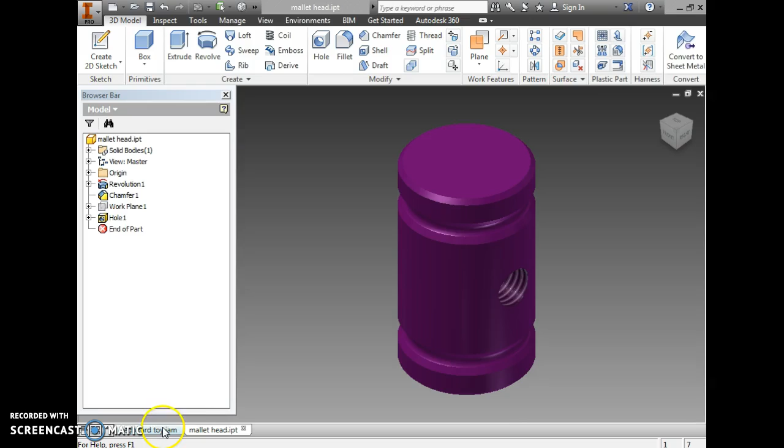Right now I have the mallet head open because I still need to make the handle for it. I also have my main assembly open so that it's ready to go, and I have my Gmail ready so I can put it in an email and send it to my teacher, who is me.

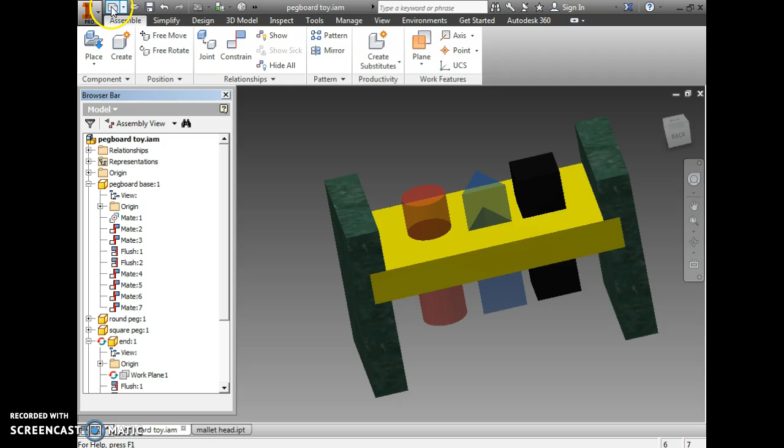So what I'm going to do first is make the mallet handle, and I'm going to try and do this from memory, so hang in there if it gets too messed up. I'm going to go New, Standard IPT, Create.

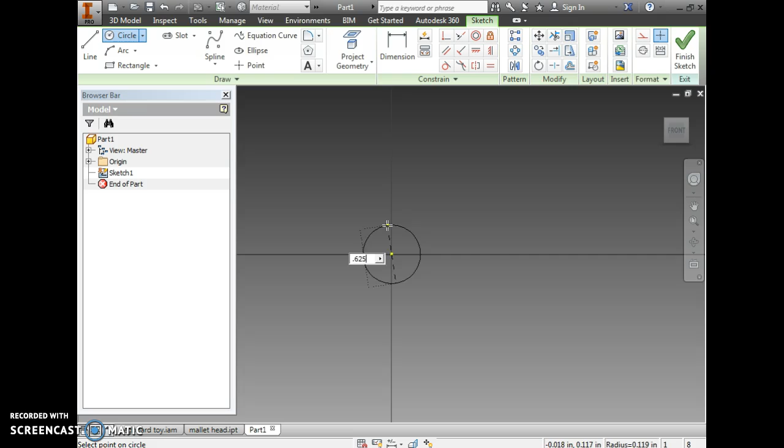We're going to start with a 2D sketch of a circle with the same diameter as the hole we put in the mallet head, which is 0.625. So it's just a circle. I'll finish that sketch and extrude it to 8 inches. Somebody did this yesterday and said, 8 inches? That seems awful long. Well, it's a handle, like on a hammer.

Let me pan that over a little bit and zoom out so you can see the whole thing. Just like we did with the mallet head, we're going to chamfer both ends at 1/16 of an inch, and I'll click on both ends.

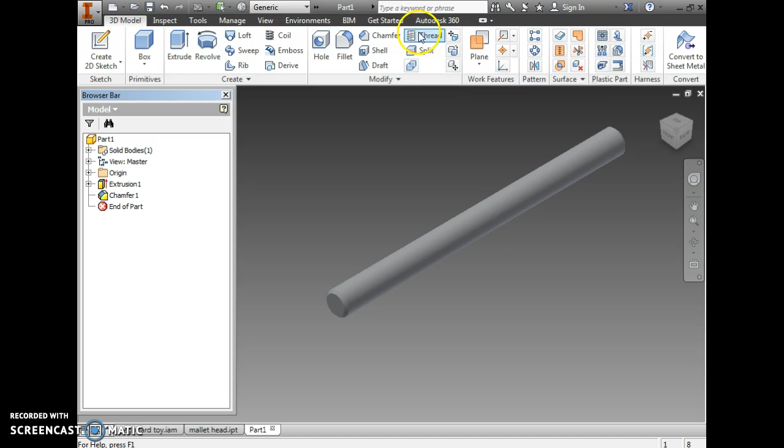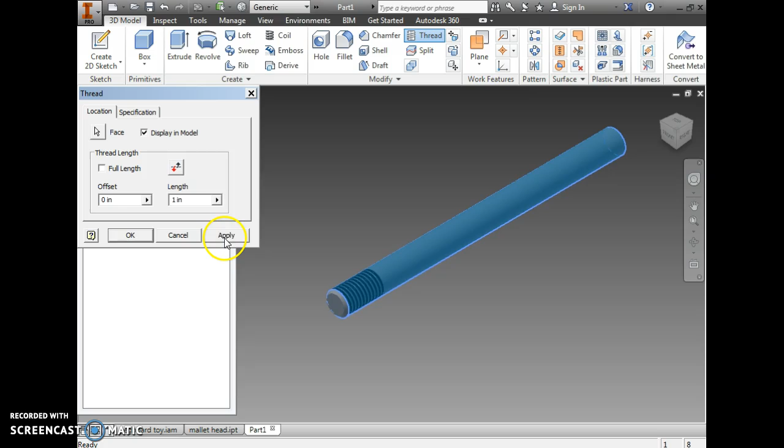We're also going to need to thread it, so I'm going to come over to threads right here. I don't want to thread at full length, so I'm going to turn off full length. 1 inch is fine - the whole depth is actually 7/8, so you could put 7/8, but I'm okay with 1 inch. I'll click on one end and apply that. So now it's threaded on one end.

Essentially, that is the handle. That went pretty quick. I'm going to close threads, and we'll try and find our smooth purple color like we used on the mallet head. There it is, right there.

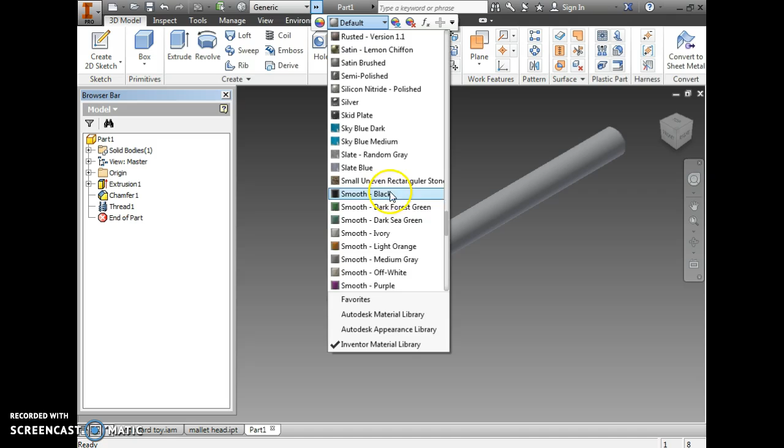Alright, so we're going to go to the big I and save as, making sure it's in the right folder. We're going to call it mallet handle. It'll probably ask if I want to replace it, since I've made many of these over the years. Yes - so brand new, fresh mallet handle. Hopefully my computer program doesn't lock up, I was trying to do that this morning.

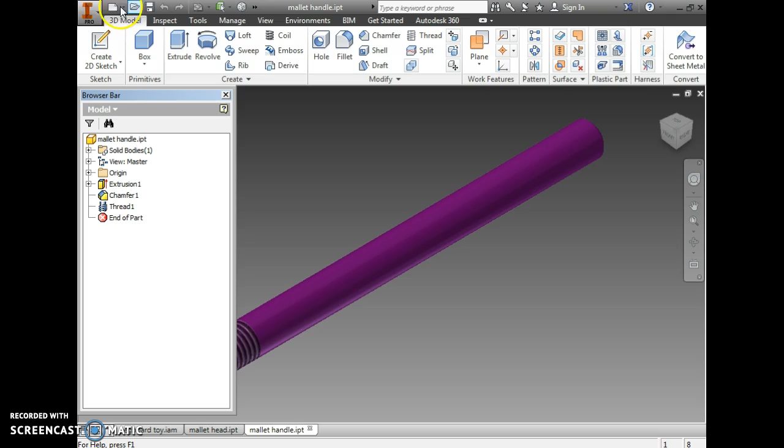Okay, so I'm going to do New, Standard IAM. I am going to do a new assembly. I'll go Create. And I'm going to place the 2 parts for my mallet, so I'll go Place.

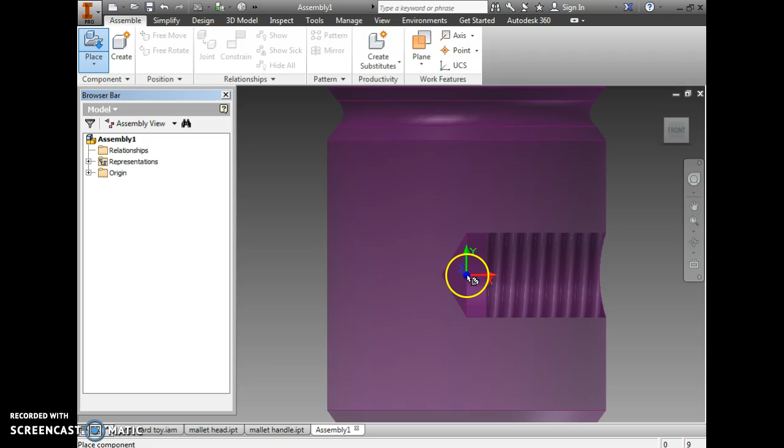First thing I'll look for is my purple mallet head, and there it is - I'm going to click that in. Zoom out, remember to hit Escape so you don't place 2 of them. And I'm going to look for my purple mallet handle. Here's my new one - I'll open that up, click it, and escape.

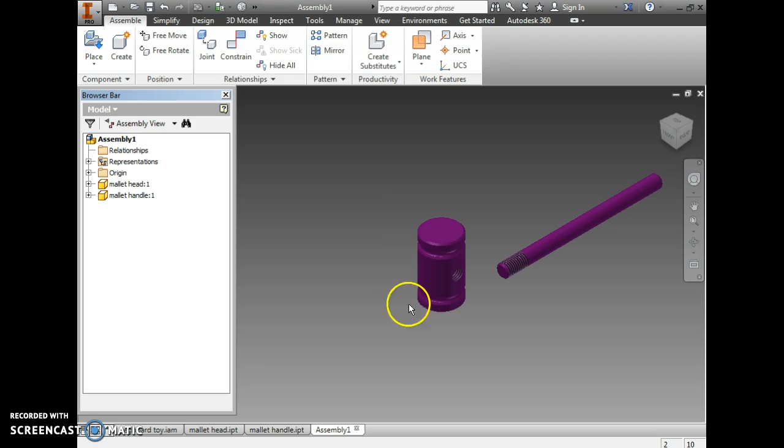Now I'm going to go to Constraint and try a new constraint. I'm going to try, over here on Type, Insert. And I'm going to look for the center line of my hole and the center line of my handle, and I'll apply that.

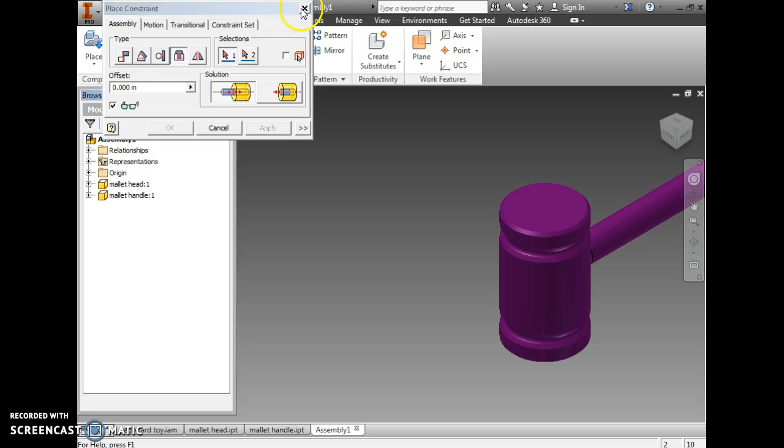Go ahead and close my constraint box. Little house on the view cube. And I grab my handle and the whole thing stays together, so I'm in good shape. So I'm going to save this as mallet. Alright, brand new mallet.

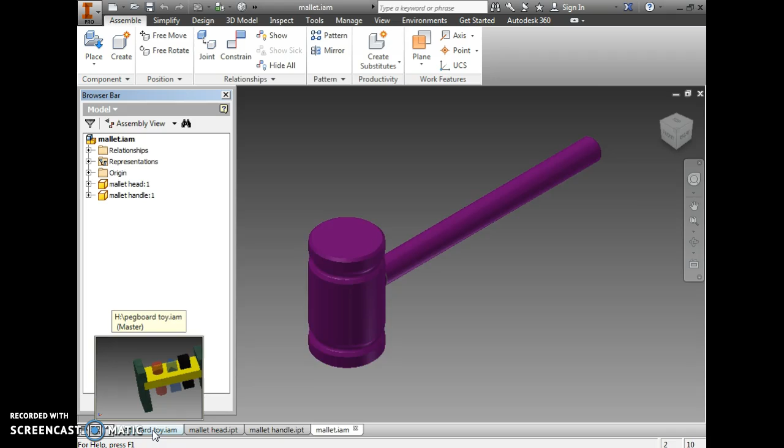Okay, so I'm going to go to my pegboard toy assembly, and I'm going to swing this around so we're right on the front view, because I want to place my mallet right above it. So let me make some room there for my mallet.

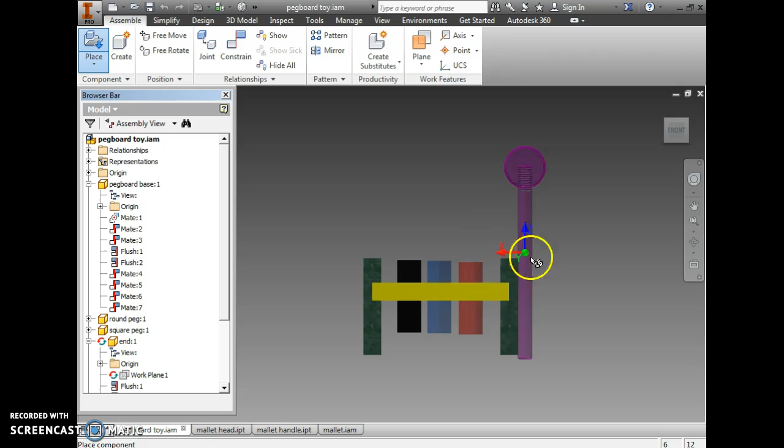And I'm going to go to place, and I'm going to look for my new assembly called mallet. There it is right there, so I'll open that. Let me zoom out - it's kind of in a weird position. I'm going to go ahead and place it, then hit escape.

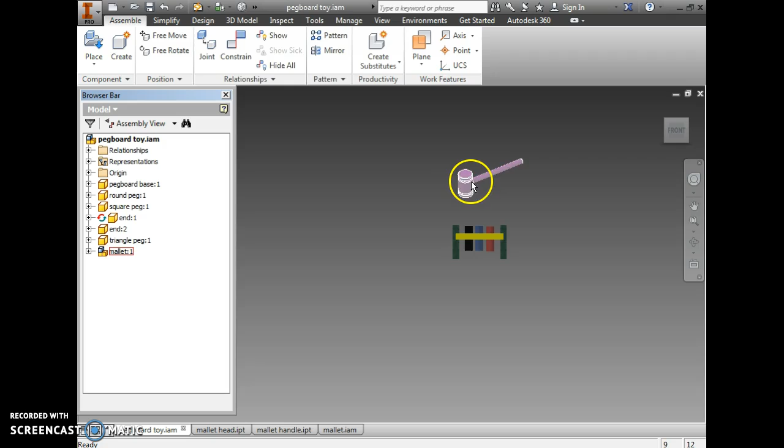I'm going to right click and free rotate it just so it looks like it's in a better position. I'm just trying to move it around so the project looks a little more presentable - put a nice angle on it so you can see all the features. Then I'll zoom in a little bit.

Now what I want to do is go to my snipping tool. I'm going to go new snip, wait for that program to start up. There we go. I'll put a box around it, trying to make sure we have all our design elements in there.

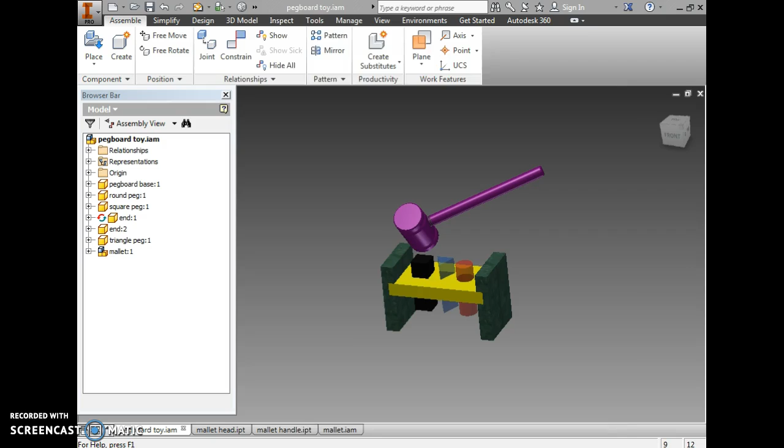Did that work? Yes. So I'm going to go edit, copy, and minimize my program. I'm going to go compose, type in my teacher's name, and we'll call it pegboard toy, colon, and make sure you put your names in the subject area - both your names, so when I search it, I can find it okay.

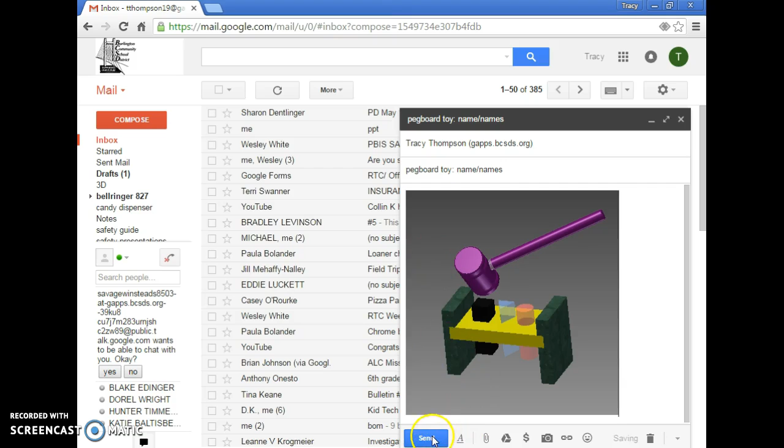And we'll paste the picture right there. So that is ready to send. Now you have that project done. Congratulations.